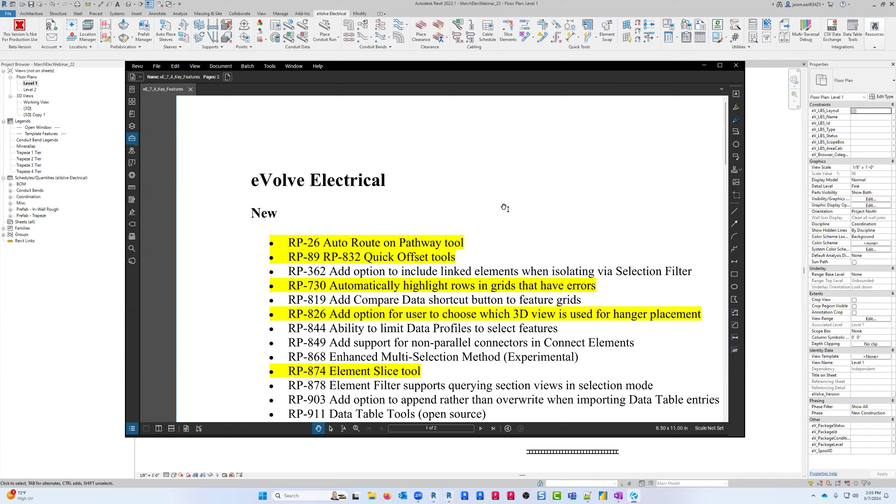Thank you, Alex. All right, let's see here. So we're coming up close to the release of 7.4. Most of the time today, we're going to talk about the new features and demonstrate some of those. Now, we did go over some of these last month, but as we've gotten closer, more of those are in the beta build that I've got to show to you guys. So let's jump into it.

First, we'll go through the new features here. This first one, auto route on pathway tool. I'll be demonstrating this one today, but we'll demonstrate that one last. I think everybody's going to be pretty excited to see that one, and we'll do that last because I think there's going to be some questions about it, and that'll roll us in really nicely into Q&A.

Over here, the quick offset tools. So let's take a look at that one. Quick offset is going to be here in the quick tools. What this is going to do is allow you to place an offset into, most commonly, a conduit or a cable tray. It does also work with pipe and duct.

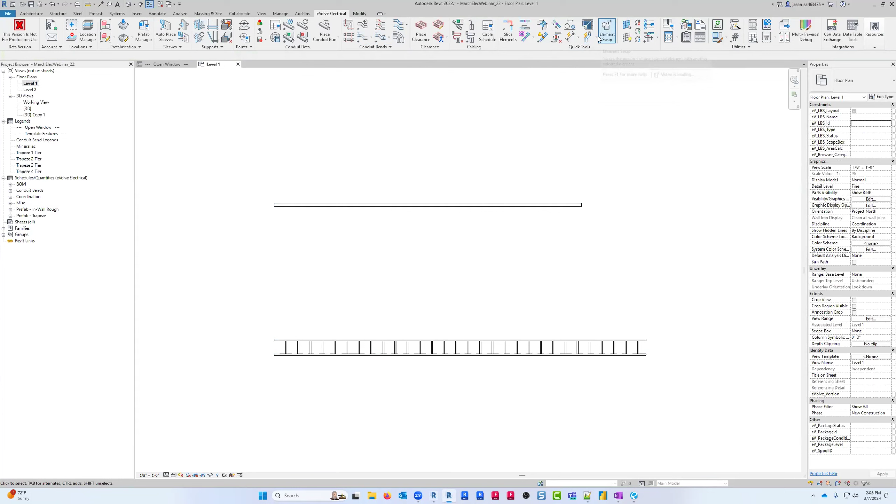The first question may be, is it a smart bend or is it a Revit bend? It's going to place Revit bends, so that's going to be more applicable to cable tray. In the future, you may have the option, or there may be a new feature that winds up over there. But for now, it's placing in a Revit bend. So in our case, it's going to be a stub 90 elbow, and it's going to be an angled bend.

So to get using this, we'll have a piece of conduit. We can also do this with multiple at once; I'm just going to do one for this demonstration. The first thing we're going to do is select our offset type. So how do I want to offset? Do I want to change elevation? Do I want to do a lateral offset that's going to be horizontal? Or do I want to do both? And that would be a rolling offset.

From there, I need to pick my offset values—how do I want it to go up or down, left or right, how far, etc. You'll notice some of these fields are grayed out. That's because they're not relevant to the offset type.

Depending on what offset type I select, I'll have different options. When you use this, it may look different by view, because depending on the view you're in, there's different context. So different options will be available, only requiring you to provide the absolute necessary information—no extra clicks or data entry.

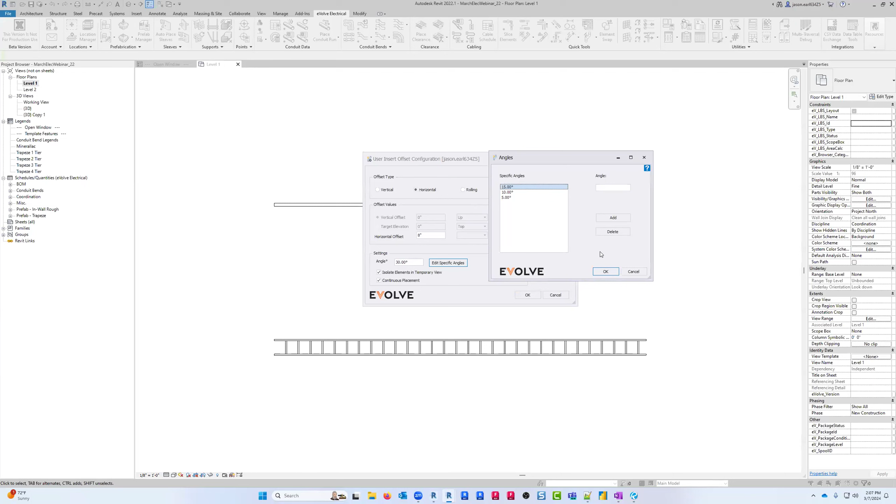So these are angles we can fall back onto if the angle we want is not there. Let's say we don't like doing 30 here—we just like doing 15 or 10 or maybe as low as 5. Those will be our fallback angles. I could have other ones higher too if I wanted, but for this context, this is what makes sense. So we're going to go with these kind of fallback or specific angles.

There are two other options here. Isolate elements in temporary view—that will just isolate the ones when you select them. So once I hit OK, it's going to prompt me to select some elements. If I have this option on, it's going to temporarily isolate them. That can be useful if you've got a very crowded view, to save a little time and frustration. That can also help in 3D views as well.

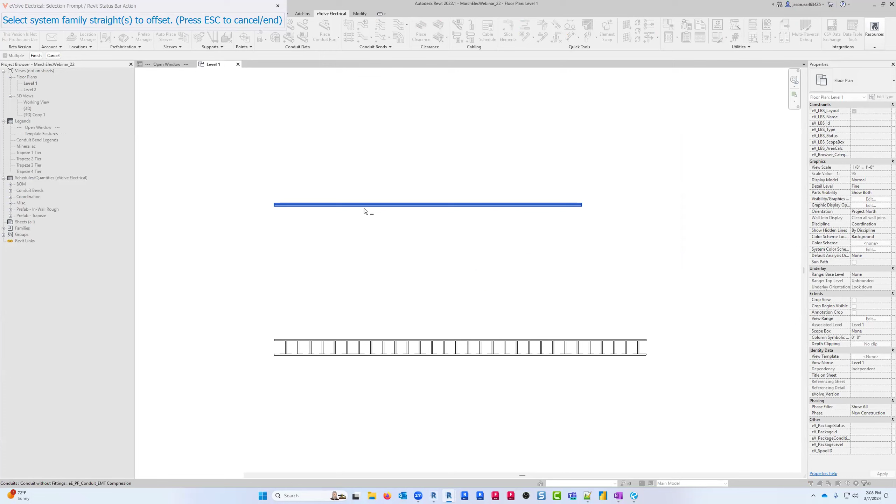Continuous placement—when this is on, it's not going to pop up the options again; I can just keep going and going. But if I want to change settings while still doing offsets, I can turn this off. So that's up to you. All right, I'll hit OK.

You'll notice I can make a selection box here, so I can do multiple elements at once. I'm just going to do one at a time for this. I've got my conduit selected—we'll hit finish. And then this is where the neatness of it all comes in.

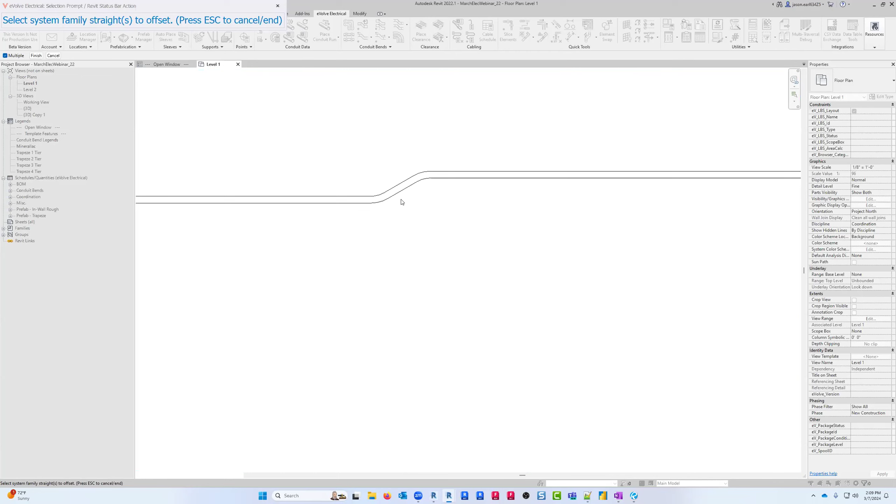So where do we want to place the offset? It's wherever we click—let's say I click back here. Then we select the quadrant to offset to. Notice we didn't say, hey, I want it to offset back and up the page, or to the right and down the page—that's based on our clicks. So if I want my offset to go up here, I'll just click up there, and now my offset is over here.

We could do it again here—click, and this time we want it to go down. It's a very, very quick way to place an offset. Now, if you're using prefab bends, this may not be the fastest way to get those smart bends in, because you could go and convert to smart bend, but that may not be the fastest way. So you can try this out, see how you like it, see if it's faster.

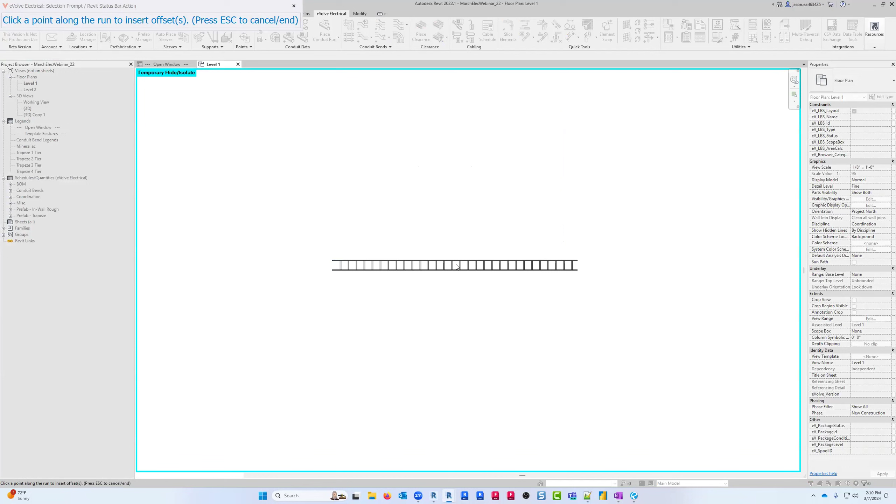But where this is really going to make life nice is with cable tray. So if we insert an offset here, I'm going to keep the options the same, and I think we'll actually find this time that the 8-inch is not going to work on 30. So we'll see what we get—I haven't tested this one. We'll go down and to the right—actually, we'll go down and to the left this time. We'll see what we get.

All right, so here we have our offset placed in. This is going to be much nicer, right? The alternative to this is we slice.

Maybe we've got to, I think if we're in the right version, Revit won't heal this. We can rotate this, say 15 degrees. Bring this down here so I can connect it. Trim it together. Okay, we got that.

Now we got this. Okay, now I said I wanted an 8-inch offset. That's what I'm planning to do. So now I'll make a dimension here. Oop, well, that's off a little bit. Okay, well, we can change this to 8 inches.

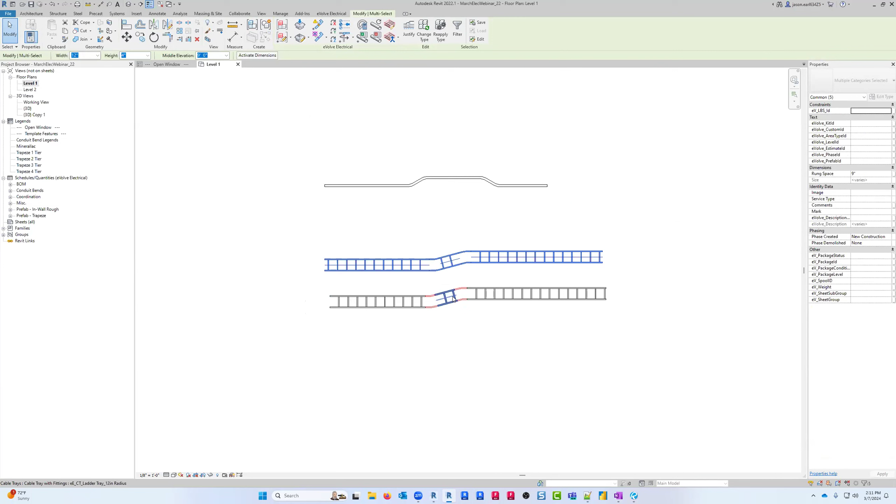So that's how you would really have to do this currently, or you would have to draw it out already knowing that I'm going to make an offset here. You'd have to draw it out at the right angles. It's very difficult to draw a specific height. You're specifying your angle when you're drawing. So big time saver here for cable tray, especially if you're just drawing out your route and then coming back and adding in your directional changes. All right, so that is quick offset.

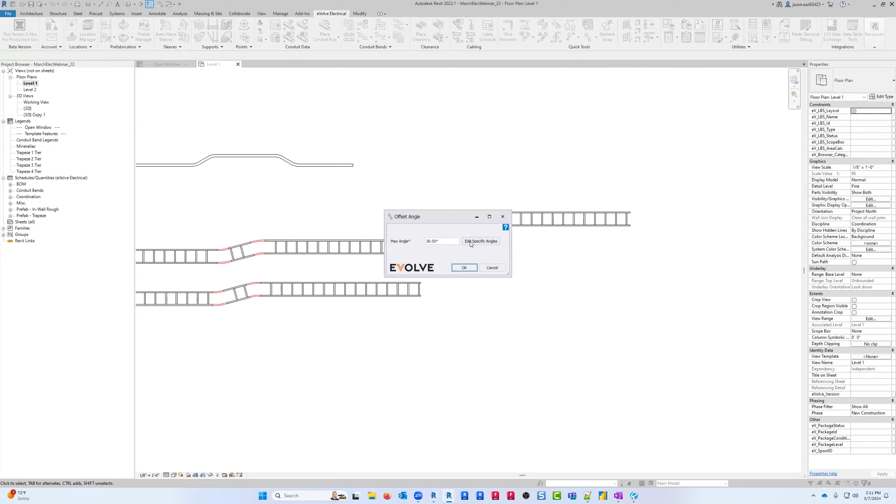There is also connect offset. This one's pretty neat. So if we take over here, if we have two disconnected elements, we can do connect offset. And then again, we've got our angle and our fallback angles, or specific angles.

And then we'll select the stationary element, excuse me. Then we'll select the other one. Again, we could select multiple at a time, and then we're going to place it in an offset. So if you don't know exactly what offset you need to place in, get your two pieces where you want it, and then let Evolve calculate what needs to go in there. All right, so we've got that.

All right, so let's keep going down the list here. So that's the quick offset tools. All right, and next up, this one, we're only going to demonstrate the ones highlighted in yellow, but I'll go through all of these.

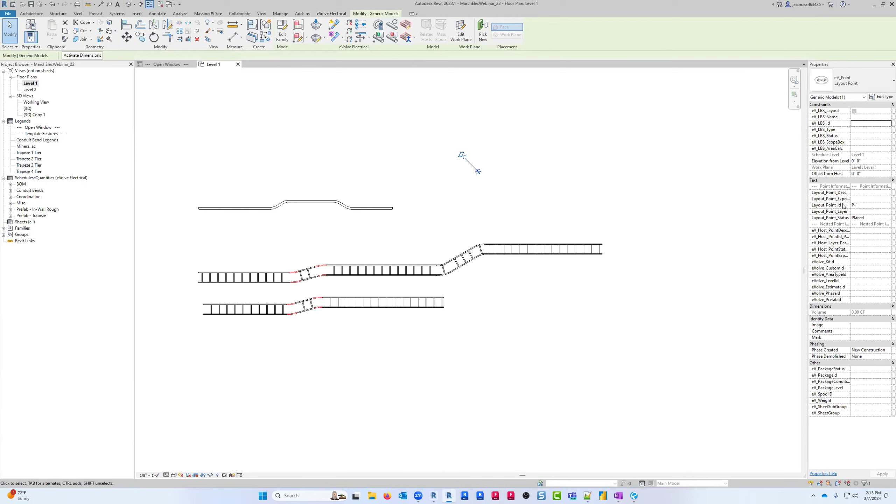We added an option to include linked elements when isolating via selection filter. So you can now query linked elements or include linked elements in isolation for those selection filters.

This next one here, automatically highlight rows and grids that have errors. So if we place a point here, we can create an error. So we'll get rid of that point ID. All right, if I open my point manager now, before, all you would have over here on the pending action and error message is that there's an error. Not always super visible, especially if we don't have this checked. And then we do, I think, this.

So if we had something like this, if this is how you kind of have your grid set up, you may not even see that there's an error. So we added this box here when there's an error. It just makes it much more visible, and also makes it visually easier to trace across the row when you have a lot of columns. So the conduit run schedule is one that comes to mind. So that's a small little quality of life enhancement there.

All right, the next one here is add compare data shortcut button to feature grids. I'm not going to demonstrate this, but I will show off compare data. It's kind of a little known tool. We added it a few versions back. It's a very useful tool though, if you're the person at your company that builds, tags, schedules, or otherwise works with parameters. So if we open this tool...

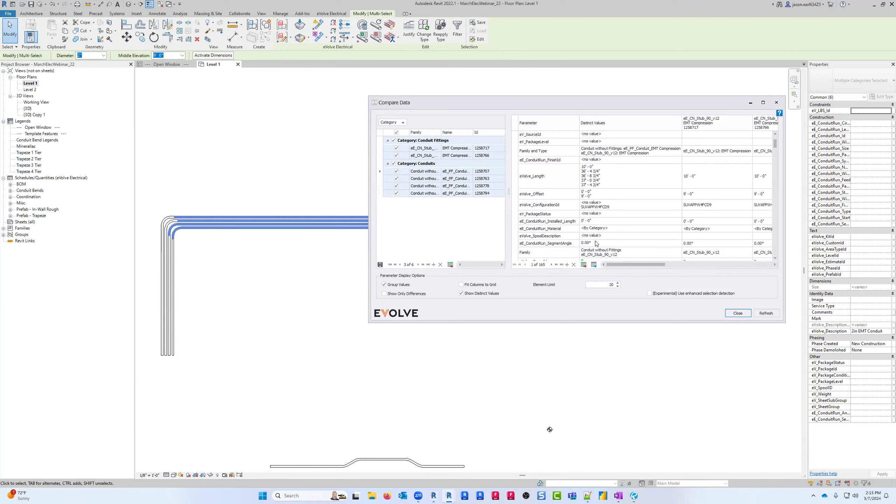Evolve does use some hidden parameters. Revit also may have some hidden parameters. You can find all of them in here. Where the compare comes into play is distinct values. So if you're setting up schedules, having an example of things that you want included, this can be very helpful in creating those filters.

You can search for parameters by using this little filter icon. It makes it very easy to search. And then we can go and select our parameter. So nice little tool there. Great utility for those that are working with parameters.

Okay, the next new feature here, or new enhancement I should say, is adding an option for users to choose which 3D view is used for hanger placement. This change is really meant to allow users to optimize for performance in large models, especially very large models.

So let's look in here and explain a bit more about what this is and when and why you would use it. By default, it's going to say default behavior. So if you've never worried about how fast hangers place, or if you don't work with super large models, you can tune out with the rest of what I say about this.

But default behavior is just what it's doing currently. If you hover over it, it'll give you a description. I believe it's using the existing view to clash and for attachment. So if you have the structure visible in your current view, it's going to utilize that structure. If not, then essentially the tool's not aware of it. So all things considered, if you've got it visible, this is going to be a rather fast execution method.

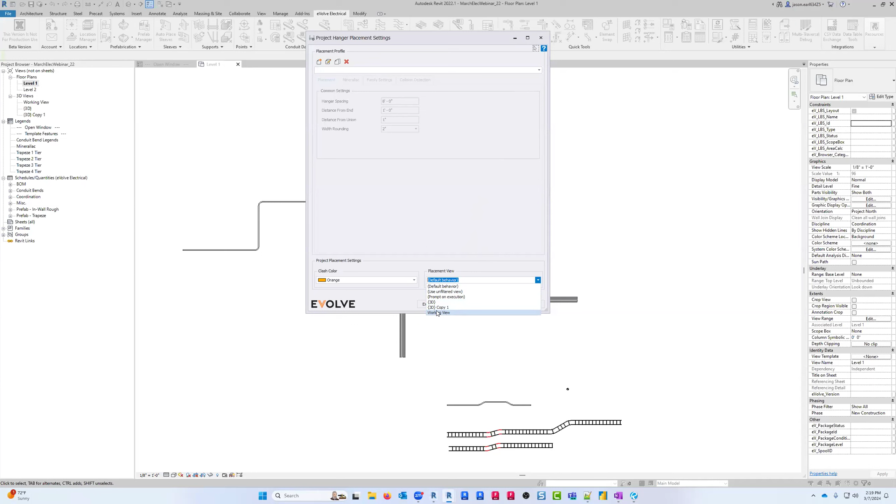So that brings us to the next option, or group of options. I can also specify a view to use. So I can create a view that has only what's necessary for the hanger placement. For those working in very large models, or even just large models, especially on large teams where you want to make the decision for people, this is going to be the best option of speed and accuracy. You're going to get both with this, or the best trade-off.

So the intent here is what you would do: I would create a 3D view, and in this view I would turn off all my links except the structural one, and hide any unnecessary elements. Because Evolve has to open that view to get all the geometry for the collision, and opening that view is what can take so long. So if the view is already created and it's not super heavy with tons of links and unnecessary work sets, you're going to get the best trade-off.

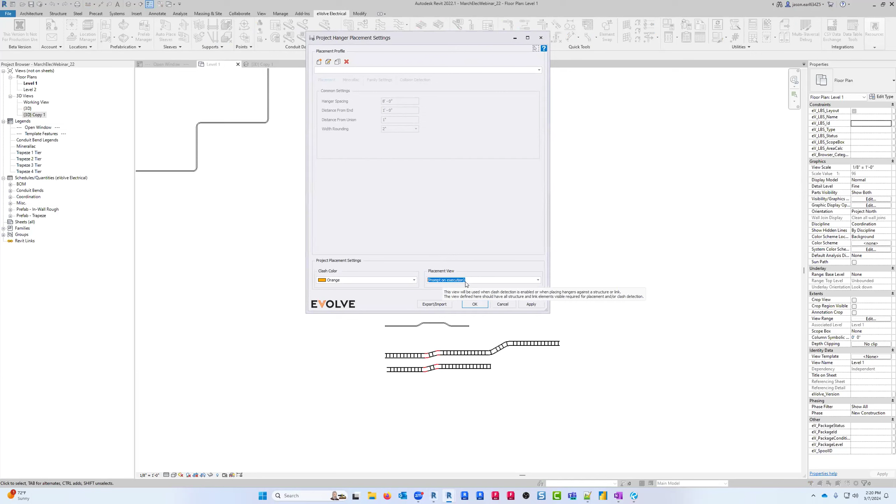So that's what the placement view does down here. There's a little description if you hover over the default behavior, and I believe if you change it, it also has a tooltip there as well. So that's the placement view change. That one is going to make hangers a lot faster for people in large models if you take advantage of this feature.

All right, this next one is ability to limit data profiles to select features. So if you're a heavy user of the utilities, you're most likely using quite a few data profiles. This just helps you organize those data profiles better.

Added support for non-parallel connectors in connect elements. So previously, when you use connect elements, the connectors had to be able to kind of drag to each other. This will allow you to select non-parallel elements. One of those elements will have to rotate, so just be aware of that when you try that out.

Enhanced multi-selection method - actually I should have highlighted this one, I'm going to show this one off. Hopefully a lot of people will like this or will have encountered this. Let's see, where is my family browser? All right, so let's say I'm going to put a kick in here.

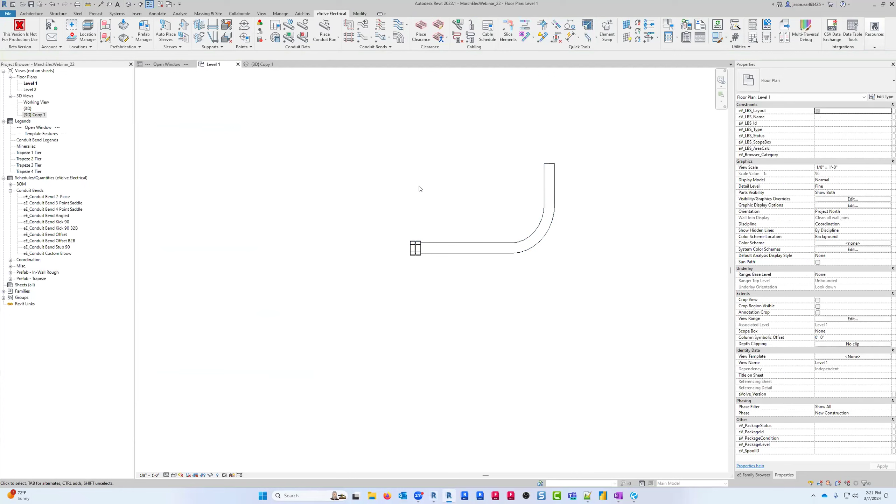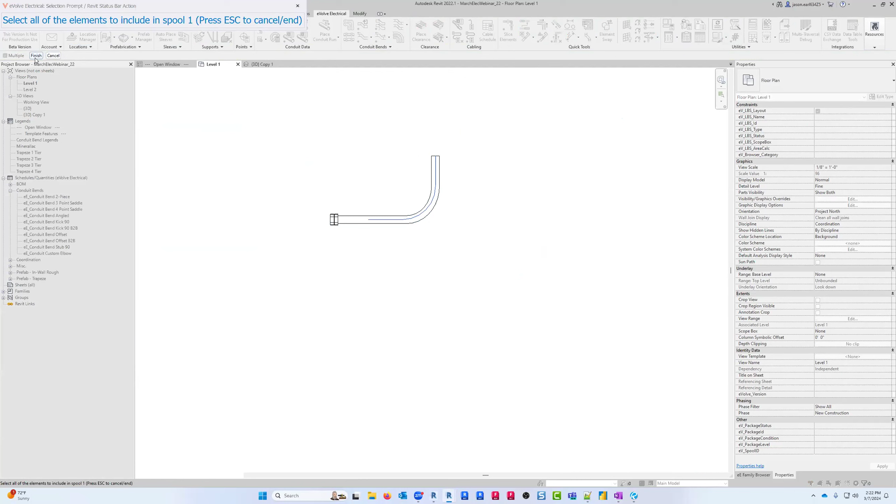All right, so if we convert this, we'll turn our couplings on. So I kind of want to show you why we decided to add this. All right, so if I go and I define a spool and I select this and I select these, I've selected this bend. However, it's not very apparent, right? It didn't really turn blue. These ones did.

The reason behind this, it's how Revit handles selection. We're using Revit's selection method. There's not really much we can do about this specifically. So it's not the best, right? It's not ideal. It's not super clear what we're selecting, but that's what we've had up until now.

So what we've got now is if you go into the workstation settings, there is a new section in the workstation settings for selection prompt enhancements. Actually, that section's already there. You'll just have this pop-up location. So that's the new kind of description of what to do. What's new in this section is enable experimental selection method.

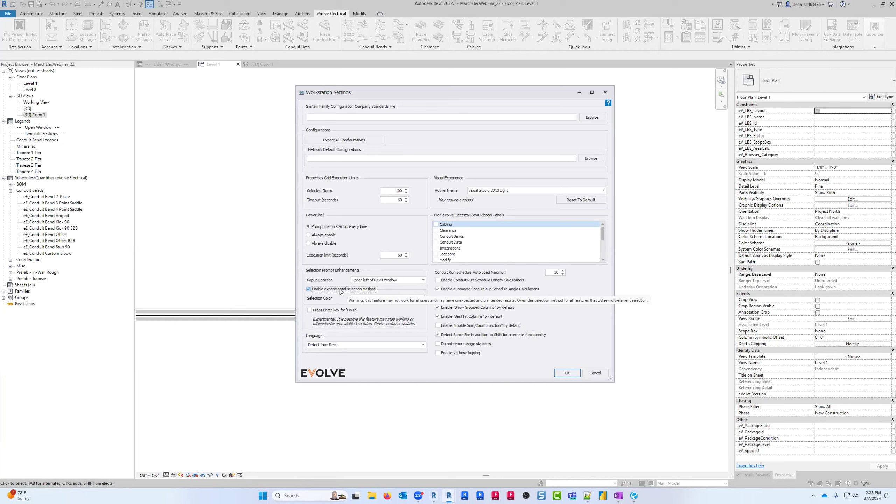The reason this is labeled experimental is because the way that it's implemented, it may not work for all users depending on your computer hardware or software. It should work for everybody, but our development team said that it can't be guaranteed because of the way that they had to implement it. So it's something that you'll have to opt into. But I think once you see how it works, most people will want to opt into it.

However, if it doesn't work for any reason on your computer, because it's experimental, you can just opt back out of it, and then you'll have the default behavior, which is guaranteed to work because we're just using Revit for that. So I'm going to choose orange for my selection color here. So you can change your color to whatever your preference is.

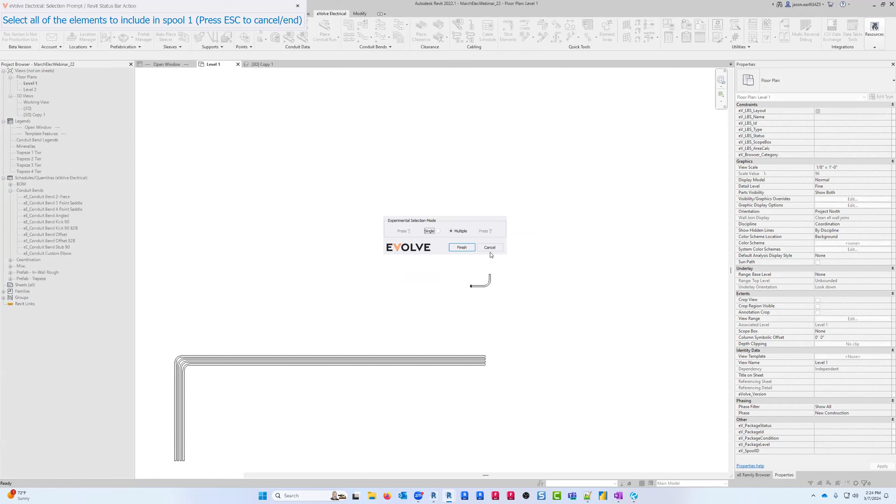So if you're using one of the newer versions of Revit, you've got dark mode or your background is black. You probably don't want to use black as your selection color. Select your color. There's even more colors. You can build your own custom color here. All right, so I've got a color selected and we've got this turned on. We'll keep PowerShell enabled. Not that that's relevant. All right, so let's go define our spool now and let's see how this looks.

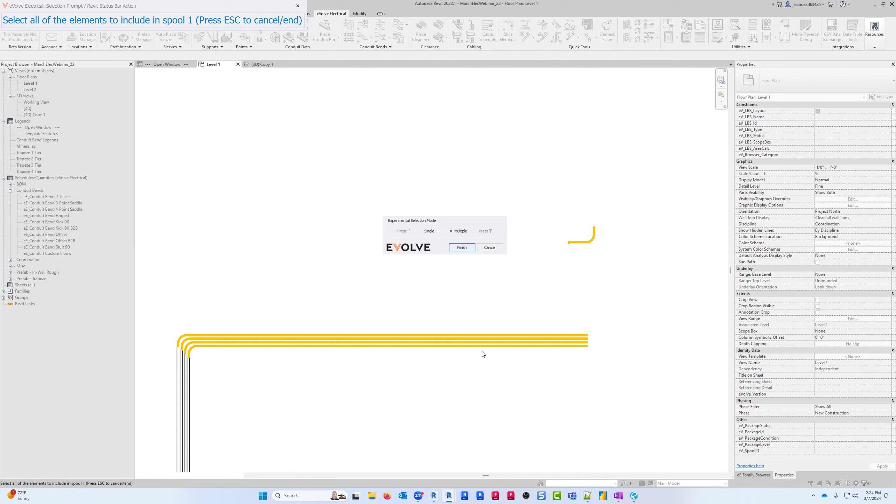Oops. All right, so right now you'll notice here, I can't move this box. That will be changed when we release. You'll be able to move this around. So don't fret over that. All right, so now when I select things, they're very visible orange. While I've got it on multiple, if I go and I select things, one thing you probably also noticed, if I change my selection, if I do a new box, it erases my old selection.

The logic here is a little bit different. If I select things, it adds to it. If I select them again, it's going to remove them. So that makes it really, really nice. We really think this is a great improvement on selecting things. We can switch over to single, and I can easily remove or add individual things. I can come back over to multiple. We just believe this is a superior selection method.

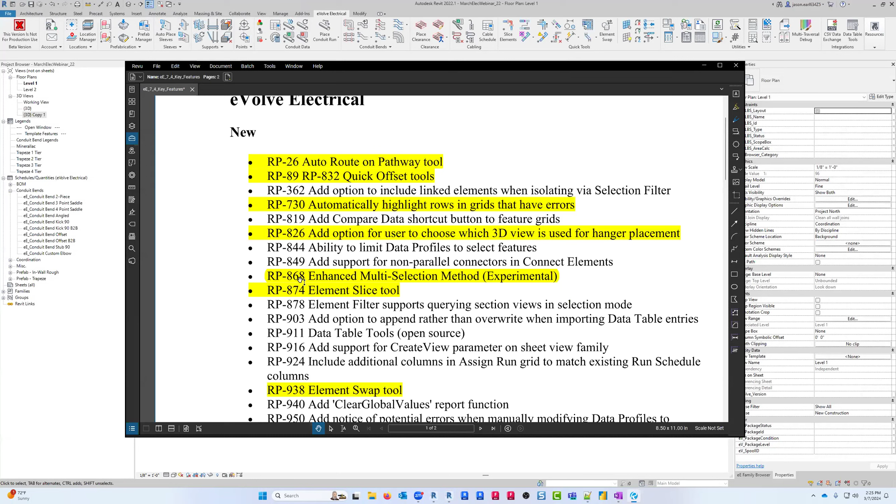However, it is experimental because it is possible that it may not work for some users. All right, so that's how it works. Really excited for that one. Can't wait to hear how people are liking that. All right, the next one here is element slice. So let's take a look at that one.

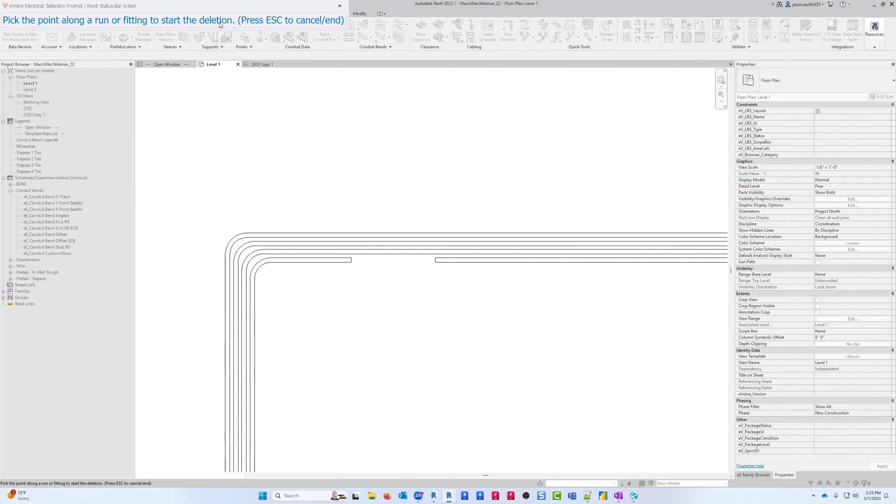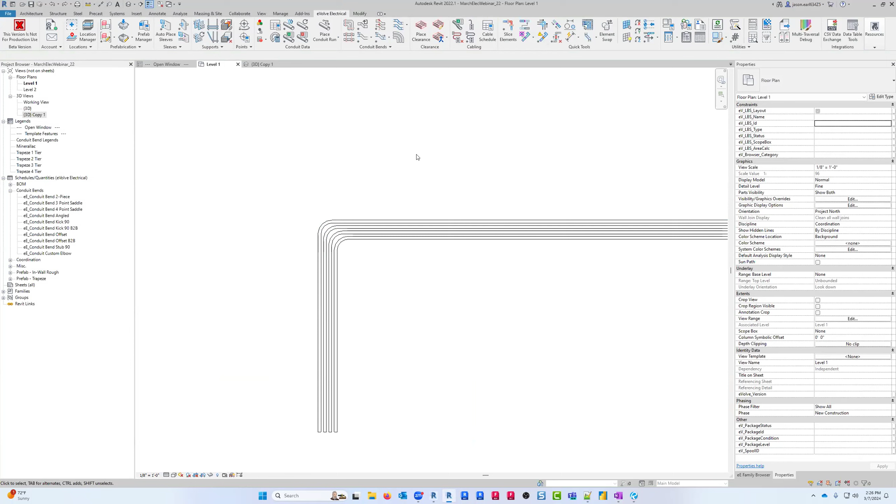All right, so I've got some conduit runs set up. So what this slice element does, if I click on it and I click 2 points on, I believe any system family, it'll work on cable tray, it'll work on conduit and other system types. It creates a gap. So that's the equivalent of using the split element, placing 2 couplings, and then deleting it. So you might ask, why did we put this in here? What use is that? I mean, yeah, I have to do that, but it's only a couple clicks.

What makes this really nice is in combination with SmartBend multi-trim. So this is where combining tools together is really going to make life easy. So the default mode for this is single selection, but if we hold shift and click on it, we can do multi-selection. Actually, let's turn this off just for convenience here, so it's not staying in the middle of my screen. Again, that will not appear in the center on release.

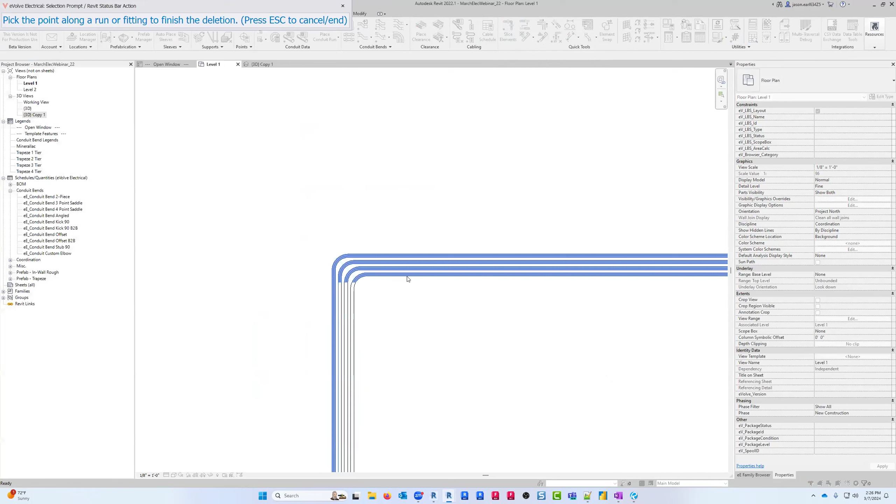All right, so let's slice some elements, and let's hit shift when we do it. All right, so I'm going to select really everything in my run. This is just kind of a short portion of a run. All right, and I'm going to break it here and here. So what I've done is I created a gap for my bends because I'm going to put kicks in here. So these are at 9 foot. I'll go up to 9'6". And then I'm going to use my SmartBend multi-trim. And I'm going to throw those in there.

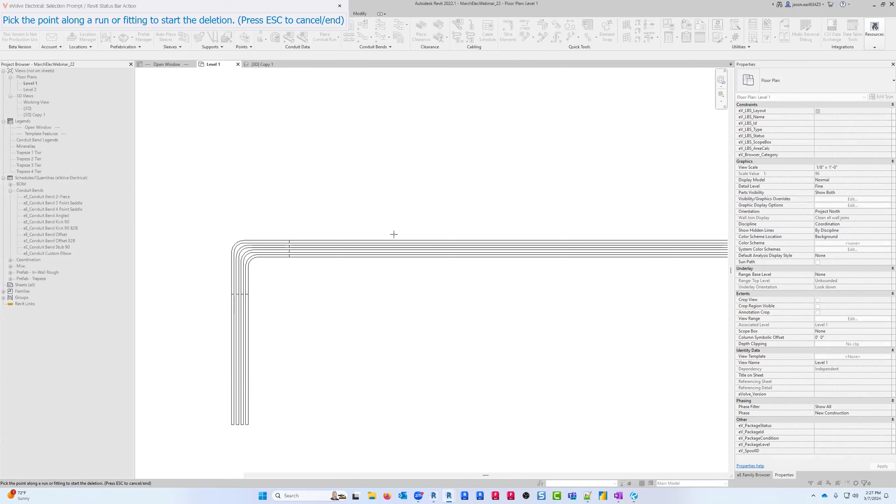And then I'll have my kicks in here. So this is a really, really nice tool in combination with SmartBend multi-trim. We could do the same for offsets.

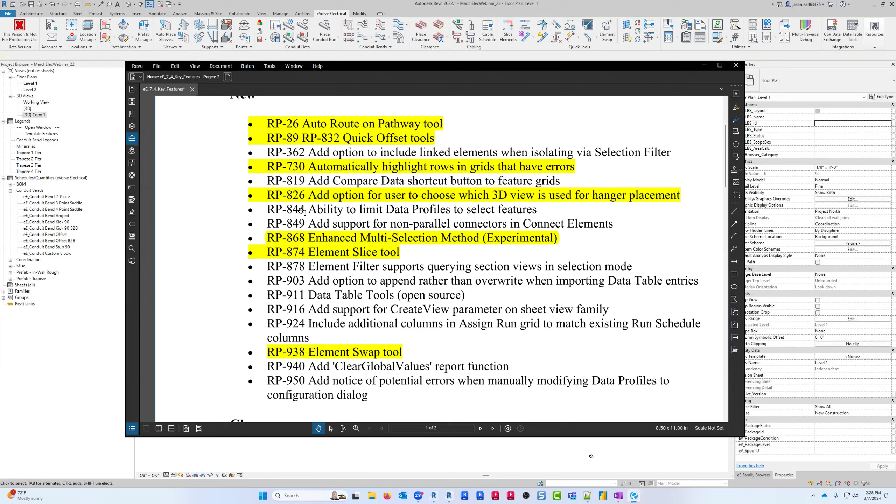What can also be nice about it is if we take, let's hold shift again. We can kind of make, oops, oh, it won't let me select those. That's interesting. I'll have to look at that. But we can kind of make 2 gaps here, and then we can rotate this or do as we will.

So there's more than one application, but the inspiration for this was really to kind of pair it with SmartBend multi-trim. So that's one of the new features.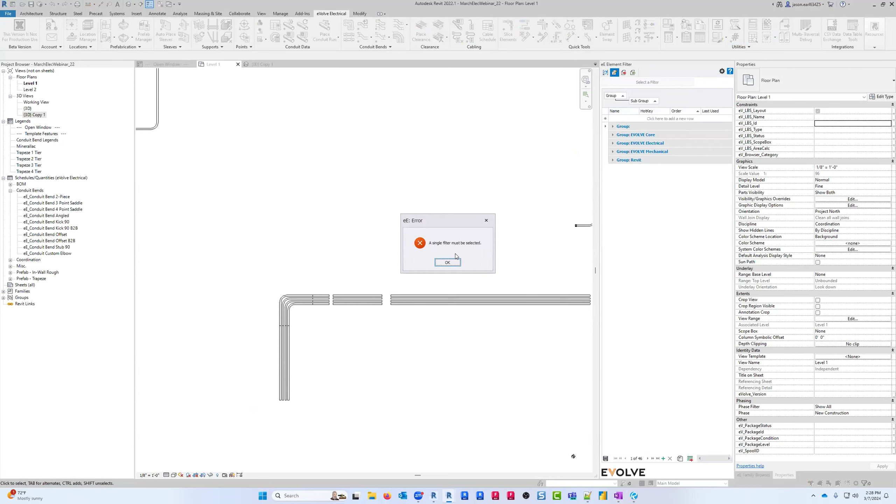Next up in here, we've got element filter supports querying section views in selection mode. This one I want to make a note of. Let's see, element filter. Let's look at one of these real quick. Okay. We'll kind of skip past that. The main thing to know here is that you can use section views now in element filter.

If you have any trouble getting it to work, there may be some kind of asterisks on how you go about it because of how it had to be implemented. If you run into any trouble, just reach out to support. We'll be happy to help. And then we'll be providing some documentation on that.

The next one up here, add option to append rather than overwrite when importing data table entries. So that's an enhancement with data tables. Data table tools, open source. I showed this one last time.

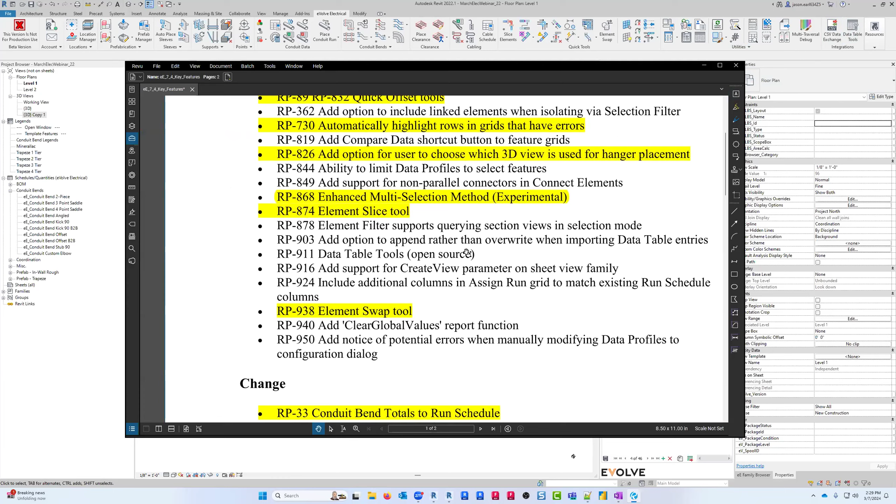The main thing to know here is if your company is using SQL and there is data in that SQL database that you would like to bring into Revit, reach out to us. We can help you configure and use this tool. It's certainly an advanced tool. It's actually open source. It's really made for developers and companies that are kind of integrating development resources with Revit.

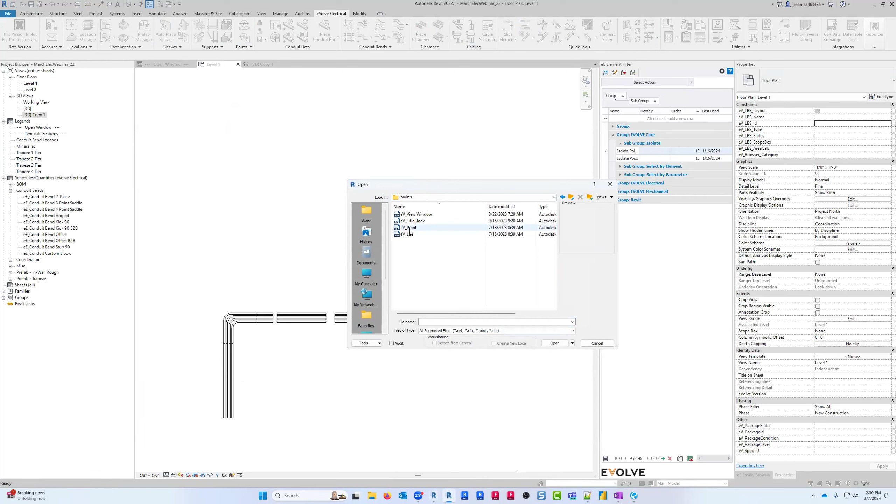The next one here is add support for create view parameter on sheet view family. This one, I'll actually mention this one as well. Let's see, let's import a family here. Actually, let's open one. Let's see, so this is going to deal with spooling. And let's see, 2022. And we'll see if the content is in here yet.

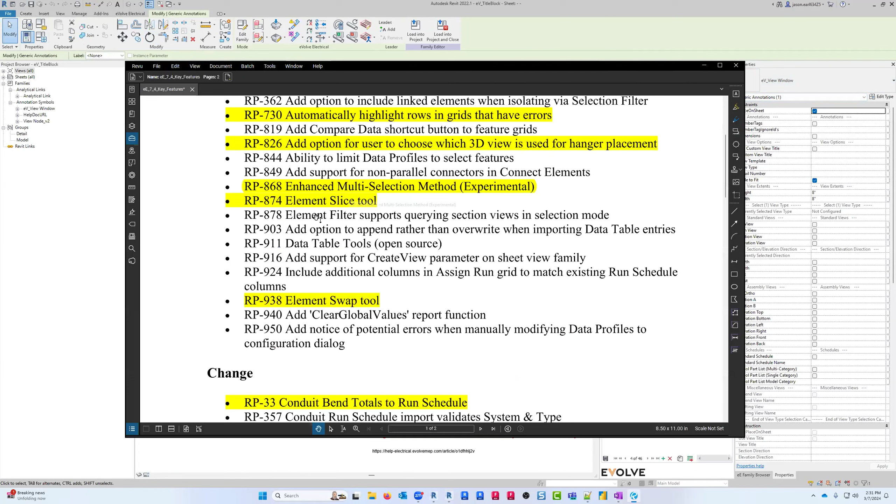All right, let's see if it's in here yet. All right, so it's not in this development build yet. What you'll notice in the live build, your view window is not going to change. There will be a new update to the view window. So if you want this functionality, you'll want to replace your view windows with the new view window.

Currently, there's a place on sheet parameter. What we're doing is we're adding an extra parameter called create view. So you'll have the options with your spool views, whether or not you want to create them, and then whether or not you want to place them on the sheet. Why might you use those? You may want to create a view, but not place it on the sheet because you're not typically going to use it.

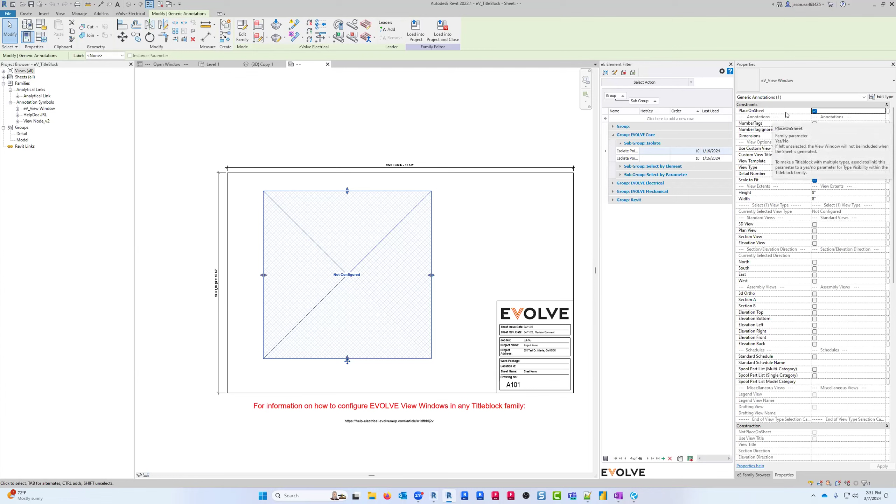You may grab it if you need it, but then when you clean up your model and you purge, you want to be able to delete those unused views. So it makes model maintenance a little bit easier, and it gives you another tool in your toolbox when you're working with really large models. So we've got that there.

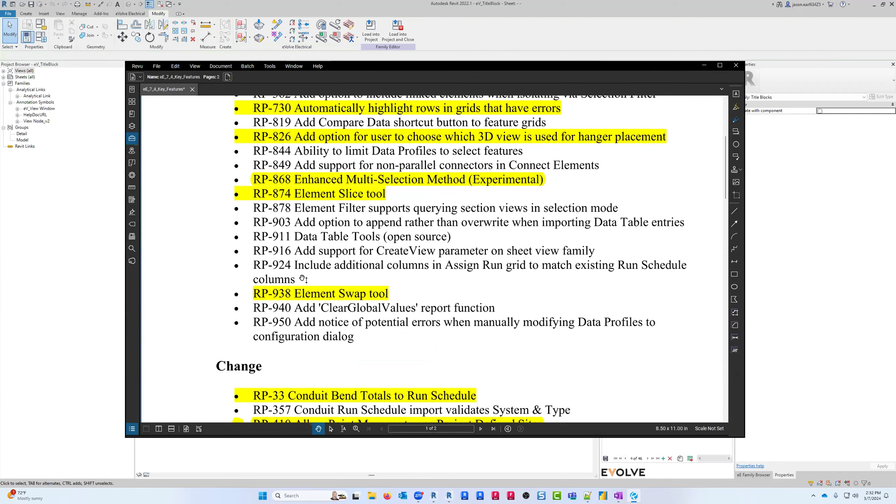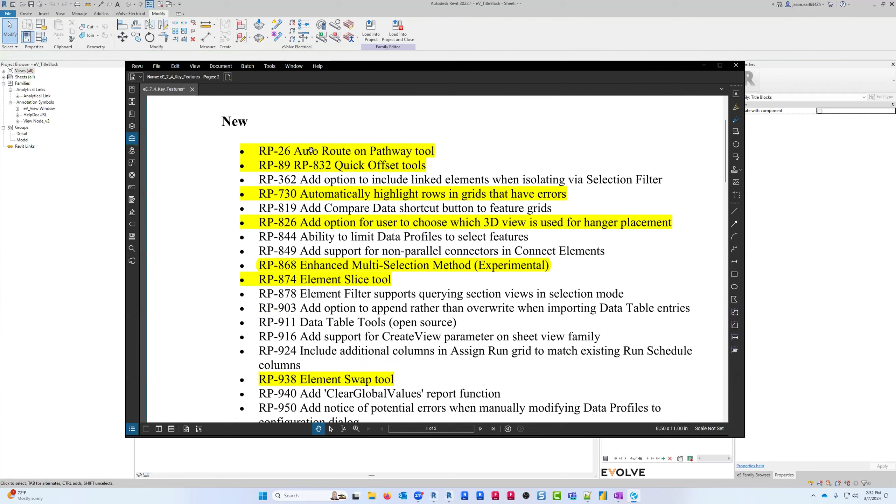Include additional columns in assign run grid to match existing run schedule columns. So when you do assign run, you'll have some more columns in that drop-down menu. It's just to make it easier to sort and kind of view the run information.

The element swap tool, we're going to come back to that one. I'm going to demonstrate that one with auto route on pathway tool. We did look at this last month, but that one was kind of created with auto route, and that'll all make sense once we look at auto route kind of towards the end here.

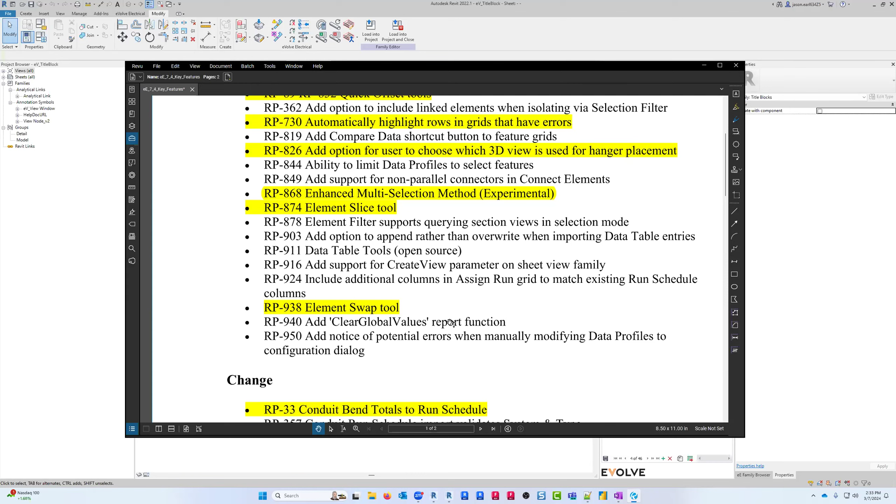We added a clear global values report function. All I'll really say about this is we've been doing a lot of work with reports internally. If you're interested in the reports, we do offer report creation as a service. We also have many example reports. Take a look at the sample files.

And we also have some videos if you're interested in learning how to do the reports yourself. There's plenty of documentation there, but there's a lot of exciting things going on with reports.

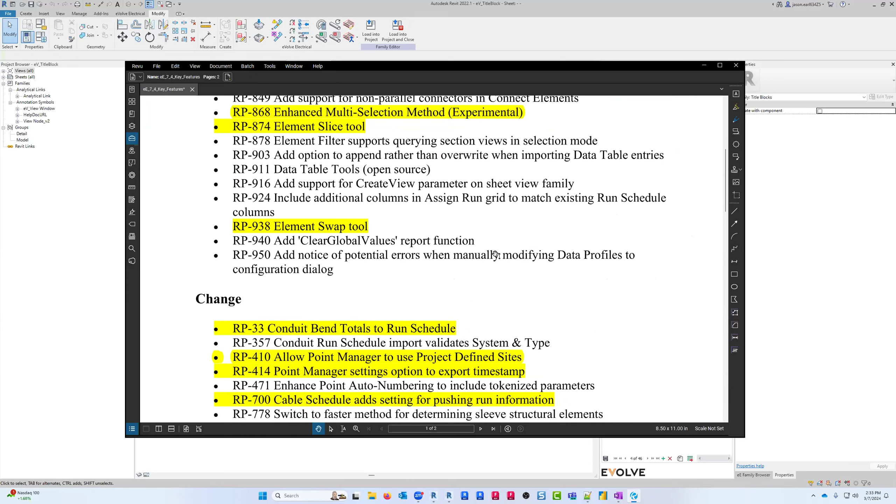All right, the last one here: add a notice of potential errors when manually modifying data profiles to the configuration dialog. We just added this because a lot of the default things that we load in, if you haven't set them up already, utilize data profiles. We just want to make it clear to users, hey, if you don't know what this is, just be sure that you know what you're changing. So just kind of a little warning there.

All right, now for the changes. We added conduit bend totals to the run schedule. So I think this is going to be a really popular one. Let's take a look at that, and then I'll kind of show you how it's working.

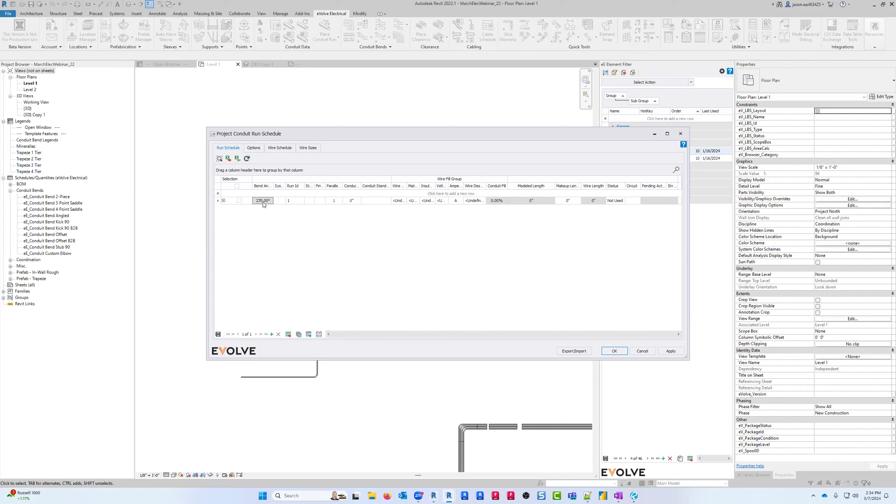All right, so when you open the conduit run schedule, you're going to see a bend angle. I'm not sure, but I think if your runs don't load when you open the conduit run schedule, you may have to load runs to get those bend angles. And I believe it will also be in conjunction with this here. So there is an option, enable automatic conduit run schedule angle calculations.

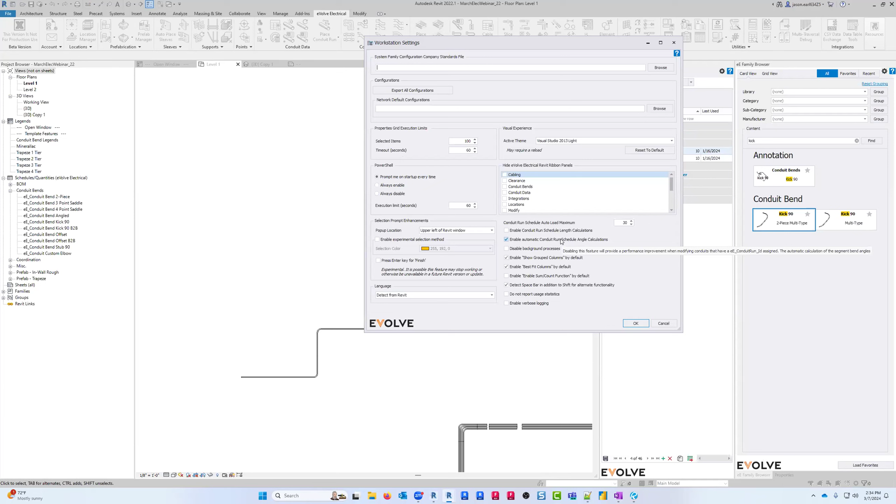So be aware on large models, this will affect performance if you've got really long conduit runs. We have to query the conduit run to calculate the angle. So it's automatic by default, but you can turn it off. So just be aware of that if you're working in large models.

All right, so how does it work? If we open the run manager here, click the right button, well, we can see it. All right, so looking in here, we've got the bend angle. You'll notice there's a bend angle here in modeled runs. So in parallel runs, you could check and make sure that they all have the same bend angle. Most likely they should, or they should be very close.

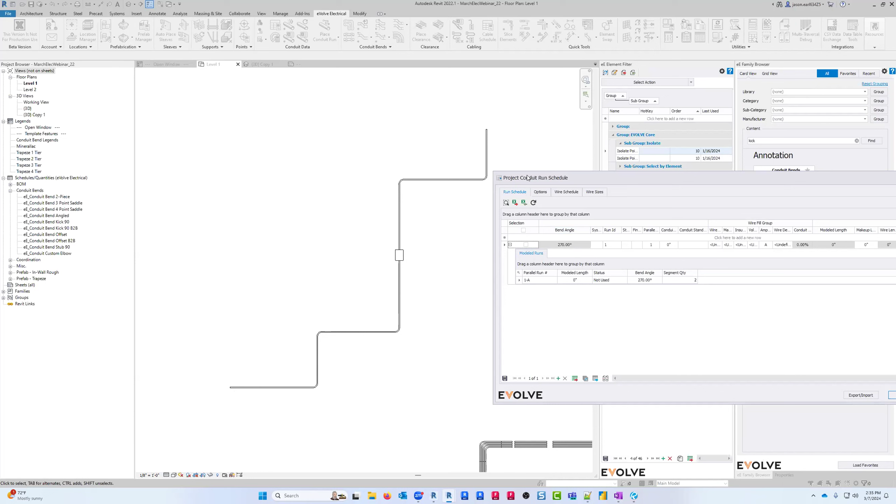But you'll notice here, this bend angle I've assigned to this run. Now, if you look at this run, there's a break here at the junction box. I've used continue run. And if you look at the overall run, I've got 1, 2, 3, 4, 5 90s in this run. So 5 times 90, that's 450 degrees, but my bend angle here is only showing 270. So what's going on? What does that mean?

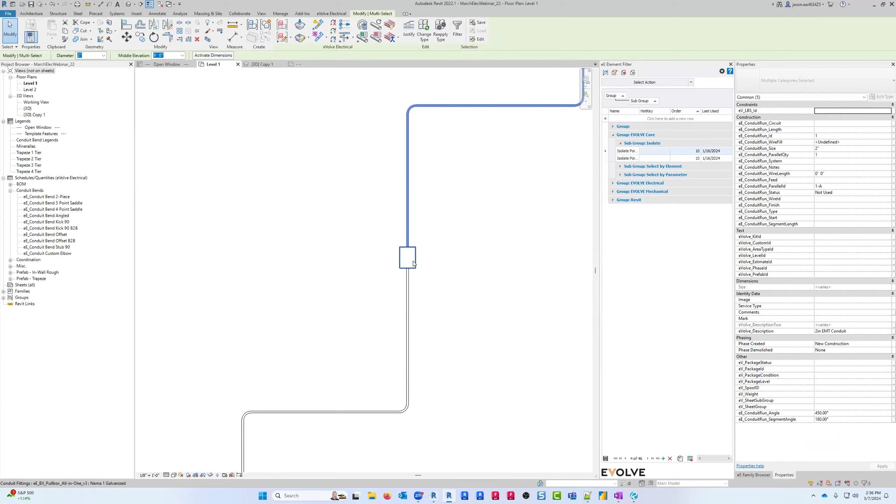Let's take a look. So if we look at this run here, my run is comprised of 2 segments. One right here at the top, and then one at the bottom. And I've got a pull box in between. So if you've got multiple segments, we're assuming that you broke it apart because you've got a pull point. If we look in the actual segments, we can look here. We can see the run angle.

So in case, let's say you were saying, hey, yeah, I did continue run, but I didn't do it because I've got a pull box. Like I need to know the full run length. Well, you can see it. It's the conduit run angle here. You can actually add this to the conduit run schedule as a column if you need it.

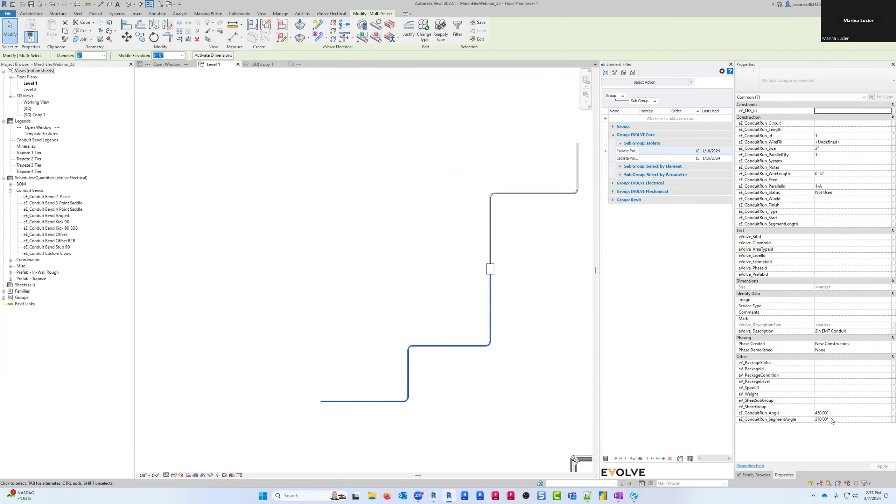So we calculate the overall angle, and sometimes you want to know that because it's, hey, yeah, it's over 360 for the full pull, but I know I could still pull this without going to the junction box and pulling it there and then looping it through. So we're giving you the full run angle, and then we're also giving you the segment angle. So that segment angle, if you're using those pull points, that's going to be what's important for making sure you're within code, that you're at 360 degrees or less. And it's now in the bend angle column up here.

So nice enhancement there. There may be some error condition highlighting coming for that in the future, so keep your eyes posted for that. All right, conduit run schedule import validates system and type. So I believe to some degree that was going on. So there's an enhancement there with that.

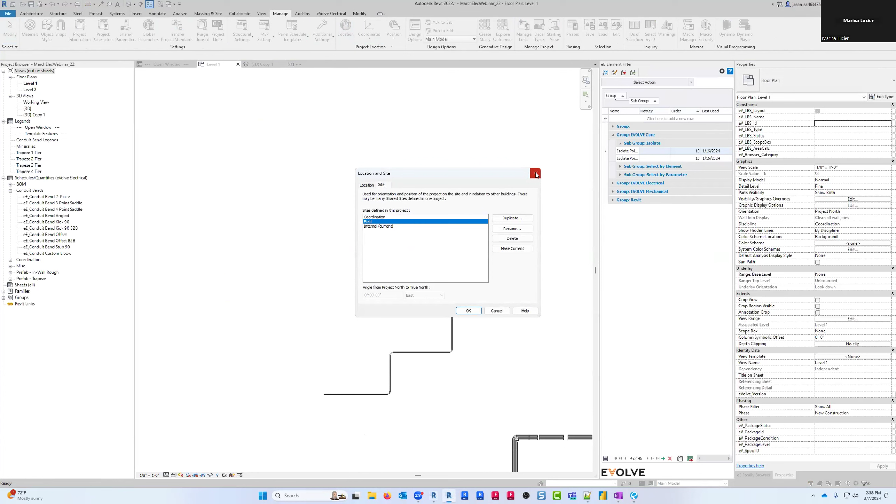Allow point manager to use project defined sites. So this is only going to affect people that understand or recognize this. If you're managing your coordinate systems or your sites in Revit in a similar fashion to this, it's going to be relevant to you. What most people do is they've got one, they set it on their survey point, and you're good to go. But if you're using multiple, this may be useful.

So if we come into the point manager here and we go into our settings, you'll see now in survey point, there's a drop down here. So from the survey point, you'll select which coordinate system you want to use. So this is essentially like how you would configure the survey point typically when you're choosing what coordinate system you want to use.

If you're only using internal, that will be the only option. You don't have to worry about this. This is really if you're using multiple coordinate systems for your survey point, and the one you normally use is not the one that you have set in Revit, or not the one that you export points by.

While we're on this, the other change here is export options. So we added the option to append some information to the file name. You can append the origin selection to the file name. Hey, this gives us a QA/QC check. Make sure we exported by the right origin. So you can do that if you like.

You can append the date to the file name. So if you want to easily know, hey, when was this exported? You can do that. If you want the time as well, if you need kind of that specific information, you can do date, time, one or the other, or both. So you've got those options now as well.

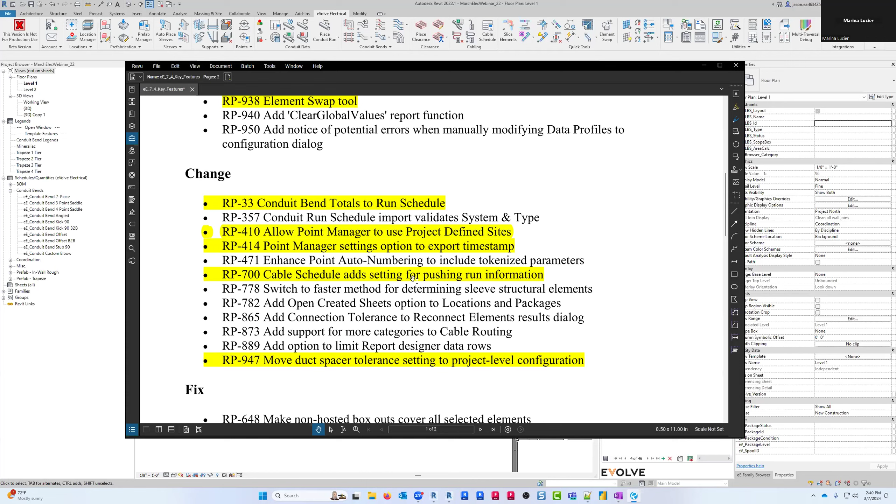All right. The next one here, enhance point auto numbering to include tokenized parameters. What this means is you can number points with a parameter. It will pull information from that parameter from the point, similar to how that would work with spools, the way you can use parameters in the naming of that.

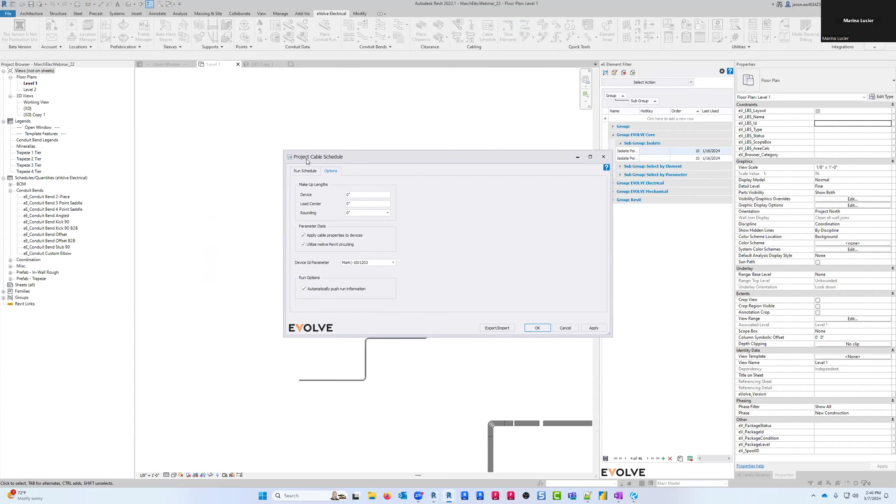Cable schedule adds setting for pushing run information. This we found out about from users. If we look, there's now a refresh cable data option in the cable schedule. This would be useful if, say, you started using this and you changed the device ID or you changed your makeup lengths mid-project. You can go ahead and refresh that, and it's going to refresh all that information. So quality of life enhancement there.

Let's see. Switch to faster method for determining sleeve structural elements. That's going to be internal. You may or may not notice a speed improvement, just depending on the structural elements that you're dealing with. Add open created sheets option to locations and packages. So now you'll have that button there that you have in spools or in the prefab manager.

Added connection tolerance to reconnect elements results dialog. I believe by default it may be set on 0, or sometimes it's at 0. So this just lets you see what it is. So you know, hey, if nothing connected, I know what my tolerance is.

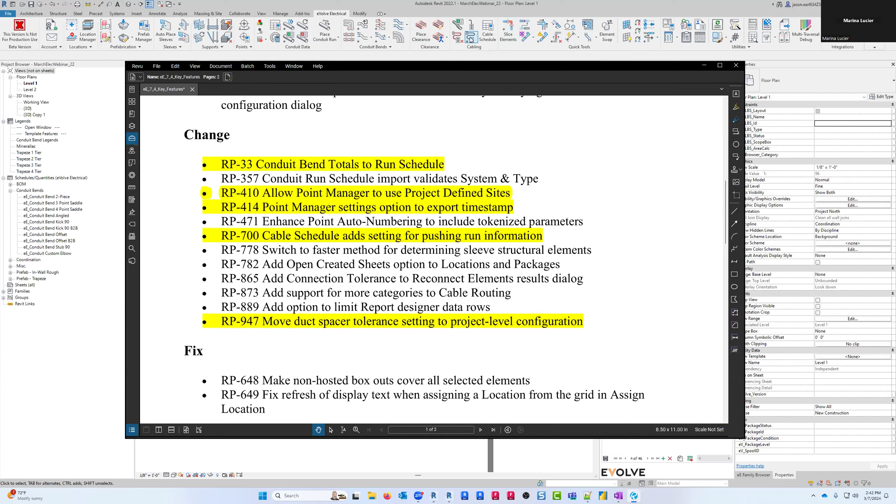Add support for more categories to cable routing. This is an interesting one. Previously, there were only so many categories that were compatible with the route cable function. We added more. Namely, one of those is lighting fixtures. So if you're interested in doing in-wall cabling, you can add connectors to a lot of different families to route MC cable to them.

If you need help setting those up, we can help you set those up. We've got an informational video. Reach out to us if you need any help with the in-wall cabling.

We're happy to help. Add option to limit report designer data rows. If anybody's creating reports, if you're doing it with a large model, this just makes it quicker to build and test your reports.

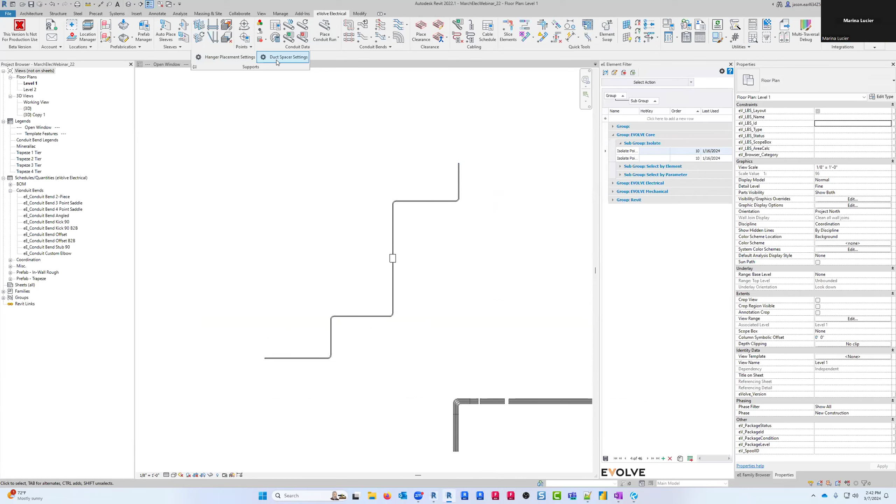This last one here, move duct spacer tolerance setting to project level configuration. I won't go too in-depth into this, but if you notice in the drop down here, it'll also show up in settings. There's a duct spacer settings now. If you use duct spacers, it also appears in here. And what you'll notice is that the tolerance is no longer here. Oh, the rounding is still there, excuse me. We put the tolerance in here.

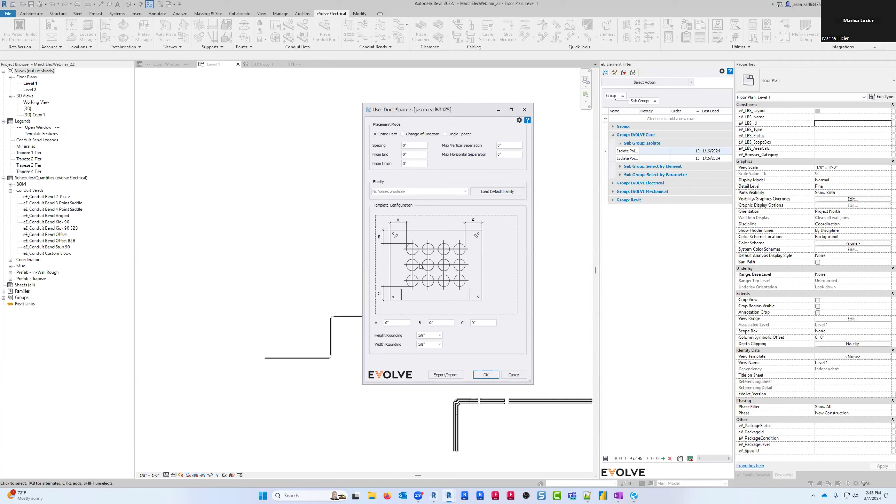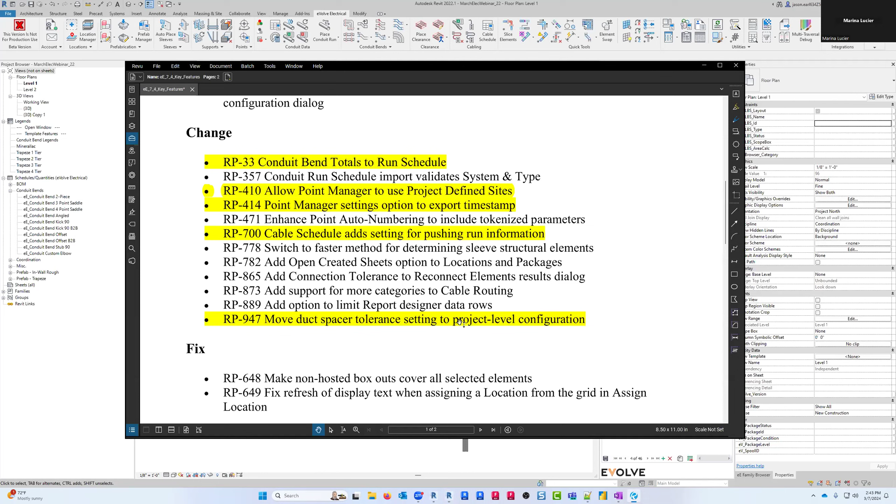This was a change to make the configuration IDs work. That's a hidden parameter. Essentially, you can think of it as keeping the data the way it needs to be, so that when you export these, they're all kind of working off the same sheet of music. That one's a little hard to explain, but it's an improvement. It works more like it's supposed to now.

All right, so there's also fixes. I'm not going to go through all of these. I've got a couple in here. I won't actually show these, but these are the ones I wanted to mention. We fixed sheet generation scale to fit option not working correctly.

Sometimes with scale to fit, the views would not fill up the entire box. It does now scale properly. So if you've noticed that, that's something we've fixed.

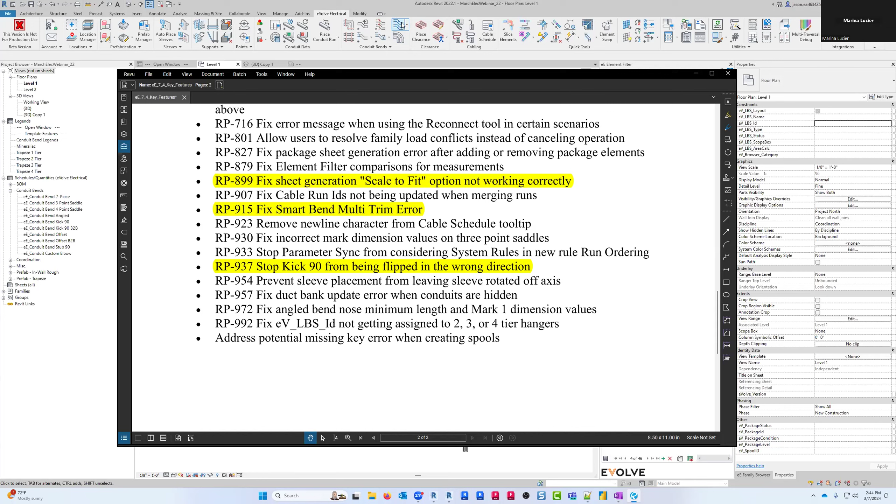SmartBend multi-trim error. In some scenarios, when you would do a kick with the SmartBend multi-trim, it would throw an error. I know that was frustrating for me when I saw it. If it frustrated you and you stopped using the tool because of that, give it another visit. We fixed that. So that's working now.

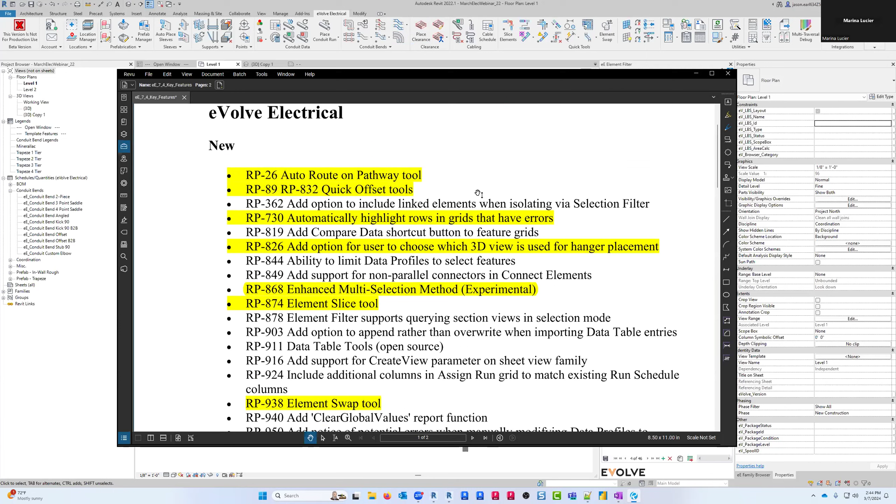Stop kick 90 from being flipped in the wrong direction. I believe that was also with the SmartBend multi-trim tool. That's now fixed as well. All right, so on to the kind of big ticket item here, auto routing. So let's talk about that.

All right, so I've got a model set up here. This is a really simple example, just to kind of show you what the tool is, what it does, how to use it. All right, so the first thing that I would do in this workflow, because what this is going to do is build a workflow. It's really 3 key steps. Well, maybe it's 4, but we'll just let it be the number it is.

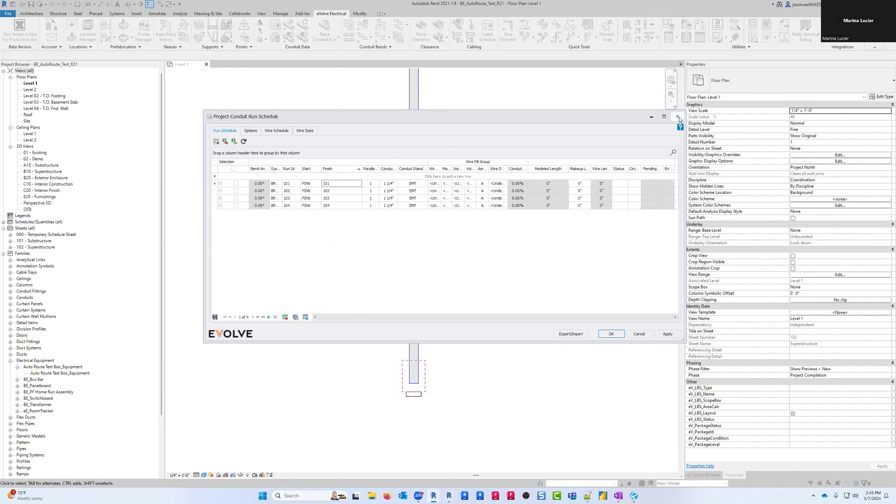All right, so the first step is either I need to place all my equipment or I need to create my run schedule. So either way I need to do those. The order is not important. I've got a run schedule in here. And what's really important in here is the start and the finish. So I've got Fin 6, 101 here.

The start and the finish is, if Evolve is going to automatically populate your conduit, we need to know where it's coming from and where it's going to. So the conduit run schedule handles that. And then the equipment has that information in here, I think equipment ID. So we need to know, hey, where is your equipment located? And then what is it labeled? That's kind of the minimum information that the tool needs to work.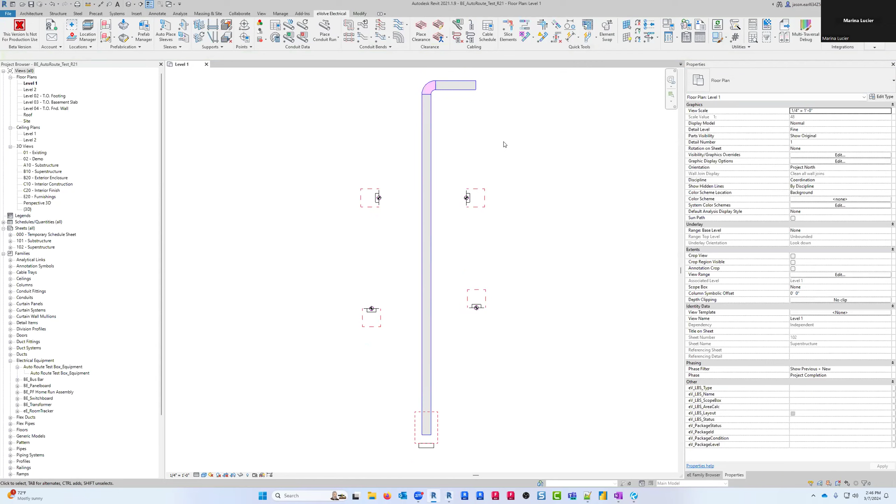Now, the next question is, what path or what route are the conduits going to take? Well, that's up to you. The way that you'll do that is with our pathway family. That's been around for a long time. You've probably never used it because electricians never get to claim space. We're always kind of forced to move. But where that's at is in our system families here in the pathway tab. So you can load that into your project, just load types.

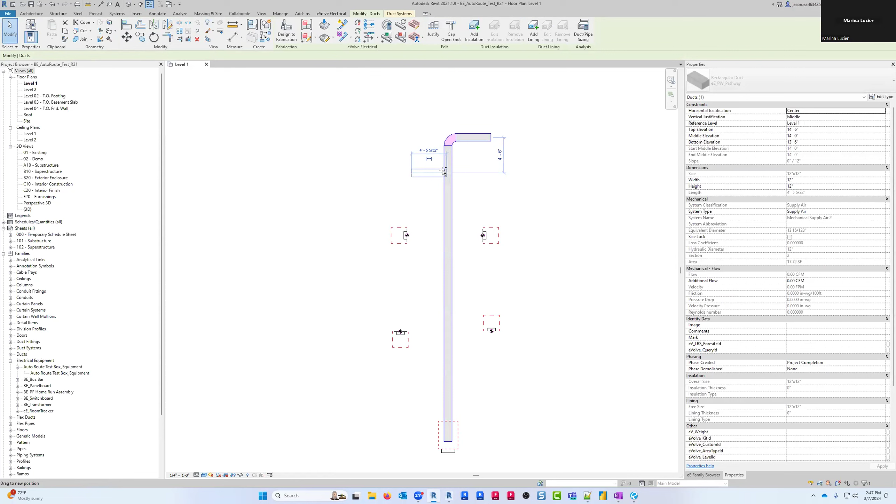It's this pathway family. When we look at it, it's a duct system family. We're not really concerned about all of this information, just really with the geometry. When you draw this duct, you don't need to worry about the height and the width. We're essentially using the center line. I'm not sure if we align to the top or the bottom of it. We can take a look when we place these, but we really just need a pathway for these conduits.

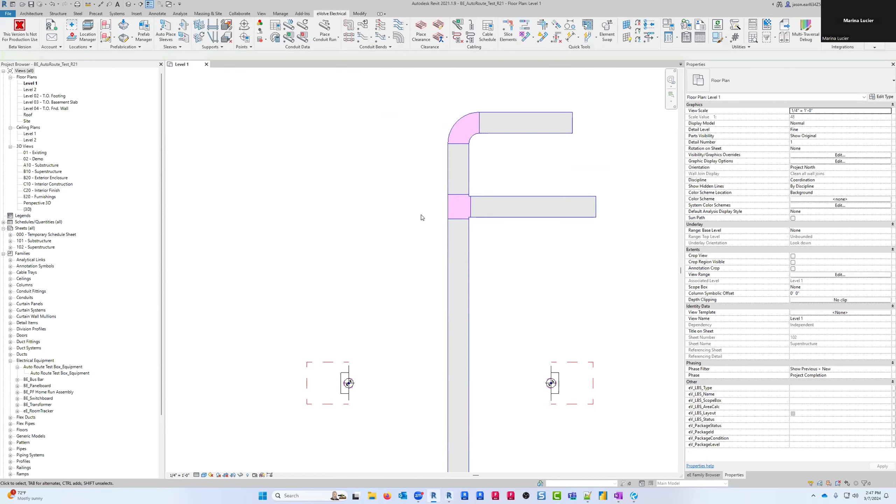I don't have it drawn in this model. Let's see if we can get it to do it. If we go here, and then we go here. Oh, I am not good at drawing duct, so I'm butchering this. There may not be a four-way cross here. I know you can put T's. I'm not 100% sure about crosses. I'm not sure if crosses even make sense with duct, but you can put T's in here. This example only has one path, but you can put T's in this.

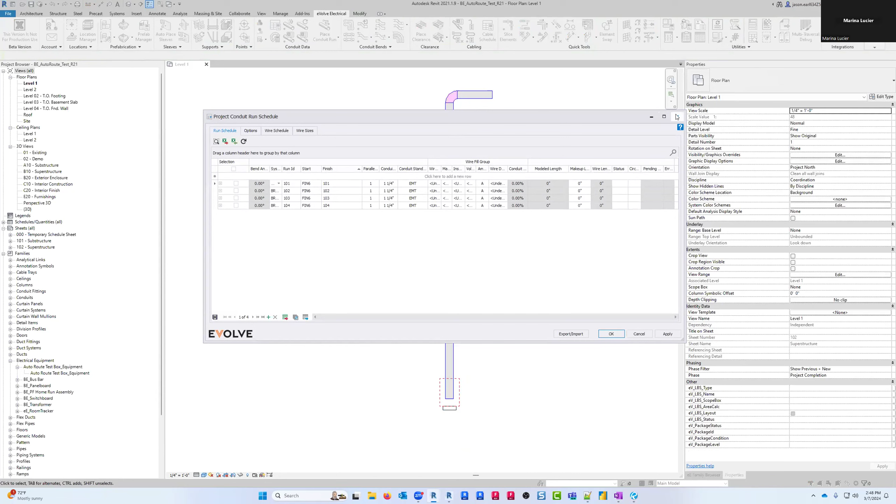All right, so we've got this simple example. So just to summarize before we place these, key pieces of information: equipment placed, pathway placed, equipment labeled with the equipment ID, and I've got my run schedule loaded in. So that's all the input that Evolve needs to be able to route the conduit.

So now when we look at place conduit run, when we actually go to use this, we're going to click on a piece of the pathway. So in my case, it'll be this one.

And then I'm going to select my runs. Before we show that, there are some settings, so let me show those real quick. This may look a little different by the time we release, but this is what's in here now.

This maximum side branch length, there will be a setting for how far can we come off. At a certain point, you just didn't draw a pathway there, or you selected the run by mistake. We're not going to draw it across the building for you. So that gives you some control over that.

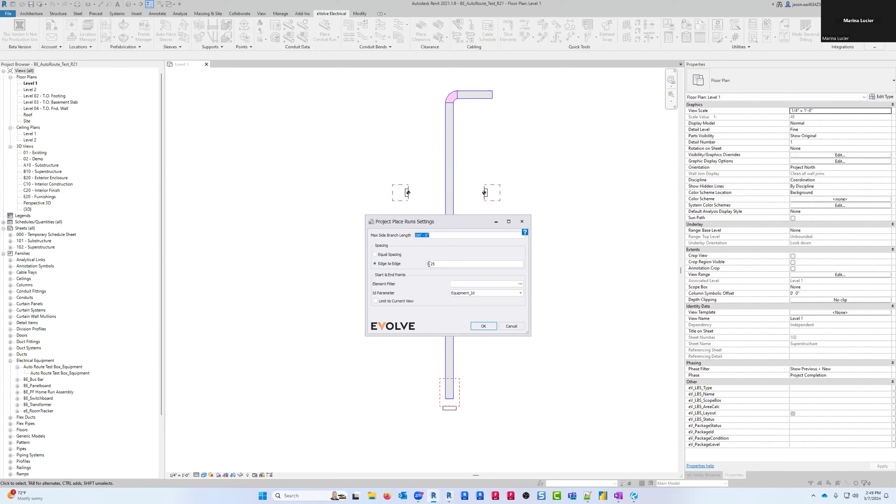Spacing here. What is the spacing that you want between your conduits? Equal spacing or edge to edge? How far do you want that spacing to be?

So when spacing comes up, the question may be, well, how many tiers is it going to place? Can it place tiers? No, currently it does not place tiers. If I place 10 runs here, it would expand beyond the pathway. They're all going to be flat, so you'll need to rearrange them how you want them tiered.

Or you can place, hey, I know I want these on my bottom tier, then move your pathway up 6 inches or 4 inches, whatever it may be, and then place the next ones. Some of the workflows will develop over time once people start to get their hands on it, and we'll be able to recommend the best way to use it. But just be aware, it does not handle tiers.

It may in the future. We do plan to improve this tool over time. You may also notice some bugs or some cases where it doesn't work. This is a very large feature on our end, and we'll be, as always, listening very closely and working very hard to improve the tool and support as many scenarios as possible.

All right, start and endpoints. So when I talked about that equipment ID parameter earlier, if you use a different parameter, you can set that here. If you use your company specific parameter, you can change that.

There's an element filter. It's not set by default, but you can filter your start and endpoints. So if you have other equipment, that can just make that a little cleaner if you run into some situations where you had a little uh-oh.

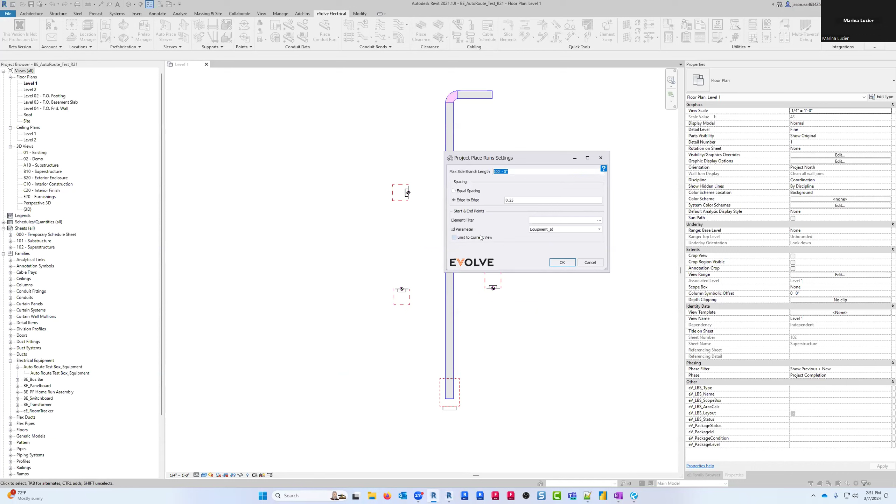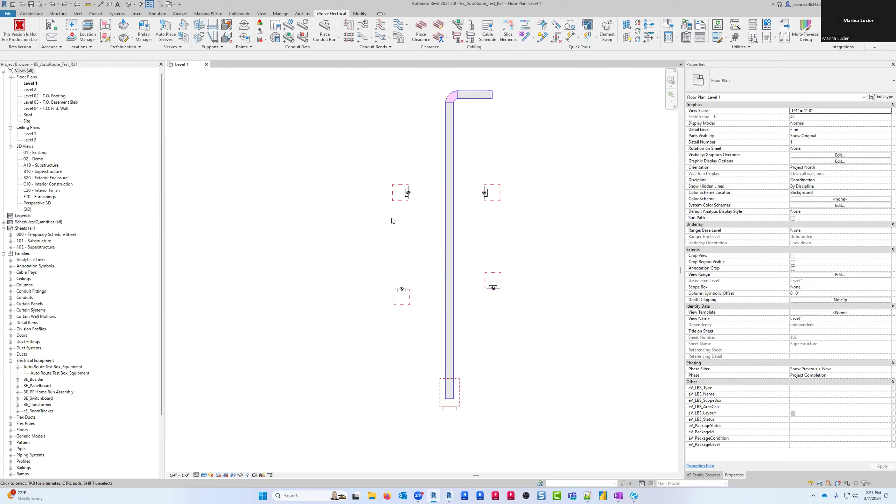All right, limit to current view. In my case, this is all I've got in the project, but if I had 10 floors, if I selected the entire conduit run schedule, I could do that. If I have limit to current view set, it's only going to do what's in the current view. If I do everything, it's going to try to run everything. However, it's only going to use the pathway I selected, so obviously every floor is not going to be connected. So that option is there as well.

All right, so let's run this, let's see what happens, and let's look at it. I've got this piece of equipment here, I've got some other equipment here. These are actually some home run assemblies, so these are technically boxes, so you could use this for branch as well. It doesn't have to just be equipment. A lot of different ways to do this.

All right, so I'm going to hit place conduit run. I'm going to select my pathway, and then I'm going to select, I think it was these three. We'll see if I picked the right ones. I forgot at this point. And we'll place those. I did not pick the right ones.

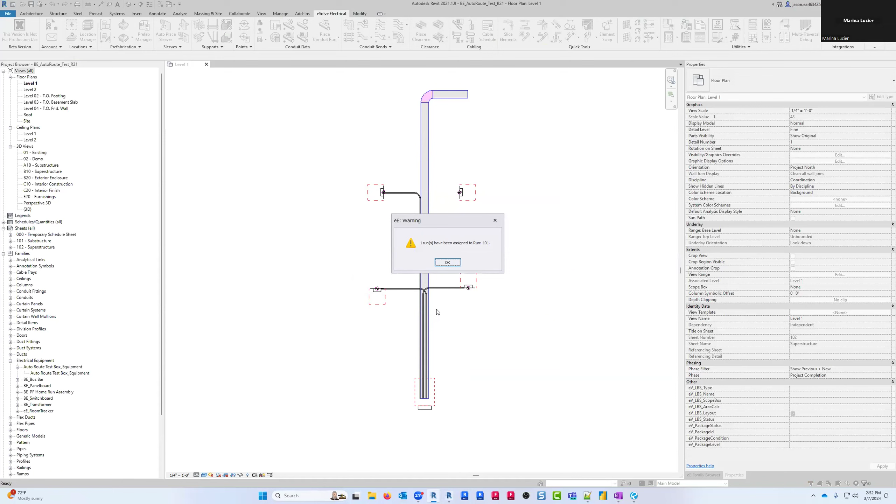So this being the development build, there's still a couple kinks we're working out. All right, so we placed these. It's going to tell me each one. These will all be in one dialog, you won't have to click through these when we release this.

All right, but now I've got my conduits. So what happened here? The conduits were placed, and we looked at the conduit run schedule, and we pulled some information from it. So we said, hey, what size should this conduit be? What type should it be? What conduit standard do you want? So we looked at that.

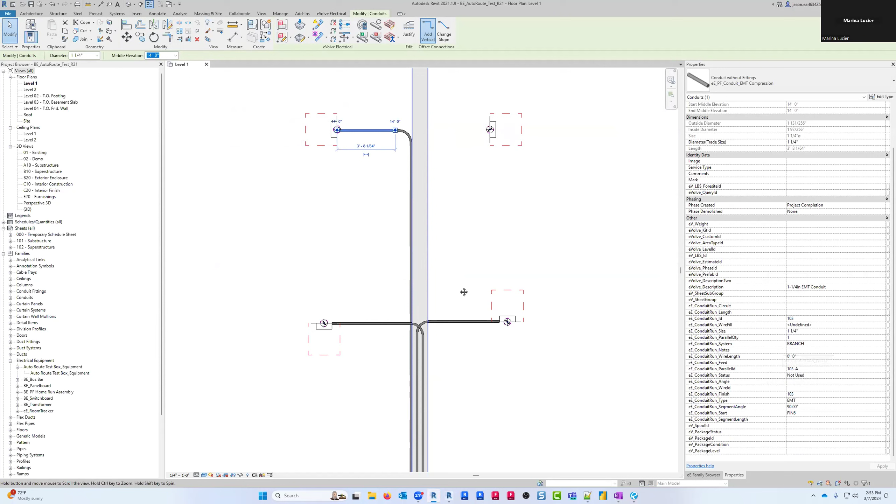We placed that. Parallel runs, does it have parallel runs? Okay, well, we didn't have to worry about that in these cases. And then one really nice thing that it's doing here is it's applying our run IDs for us, so we don't have to worry about applying run IDs.

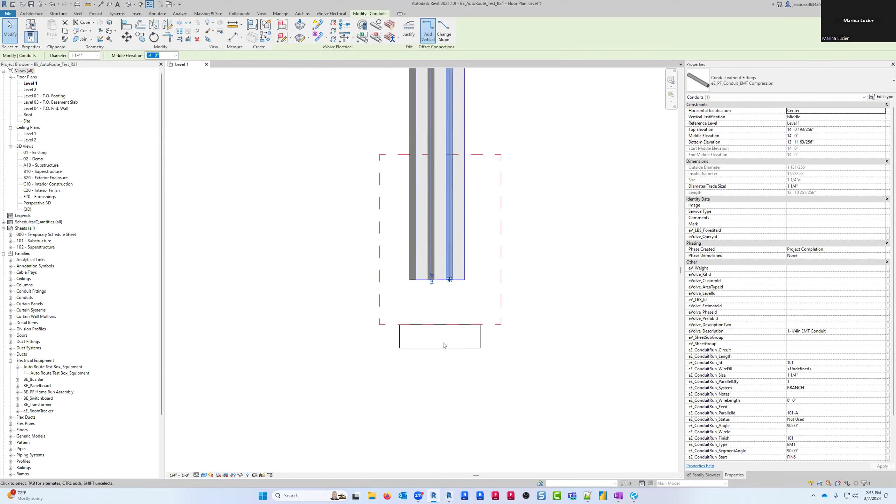So now we have the job of cleaning everything up, right, of getting everything situated the way we want. So we may need to do some movement to connect it to our equipment, kind of bring it home. So here we've got it stopping right here. This is a really simple scenario where it's pretty obvious, just stub down to the equipment. A lot of scenarios aren't quite so simple. So we'll bring it to the equipment, you take it to the equipment the way that you want it.

What we've also got here is these conduits are kind of tangled up, so we need to deal with that. That is what element swap was created for. At the end of the day, it just swaps two elements. You can use this for anything, but what it's really for is untangling these conduits.

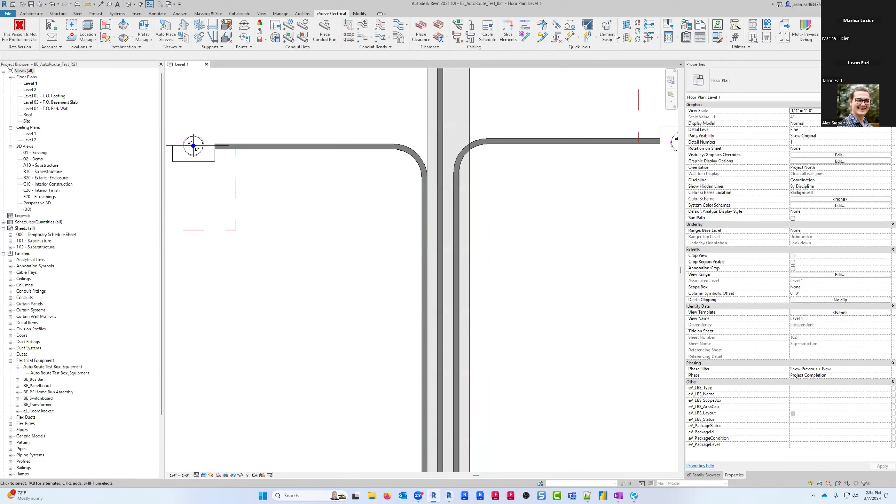So I'll come in here. Hey, whoops, we selected the wrong one. Let's try that again. All right, we know we need to swap these two. So we'll swap those, and now I need to swap these. And my conduits are good. So untangling these is actually really fast with the element swap. Don't let the tangling of the conduits trip you up.

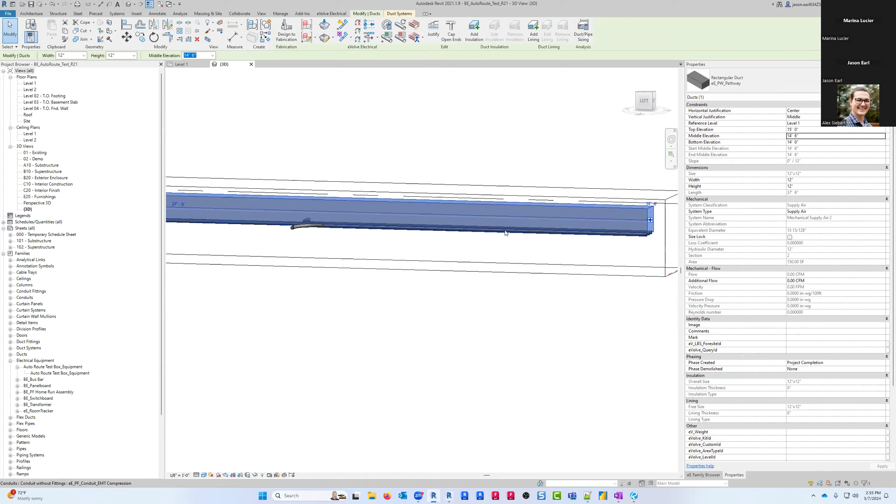Sometimes they come out really nice, sometimes they don't, but you've got a tool there to handle that. If we look at our conduits here, just to make you aware, let's turn everything on. All right, so where it's placing it at the center of my duct. So if I wanted to do another tier now, I can move my middle elevation up 14.6, and now I can run my other three runs and have them be on the top tier.

So yeah, it takes a little bit of thinking. If you want to do it that way, you can. Otherwise, just place them all and then untangle them the way that you want, doing the vertical and horizontal placement.